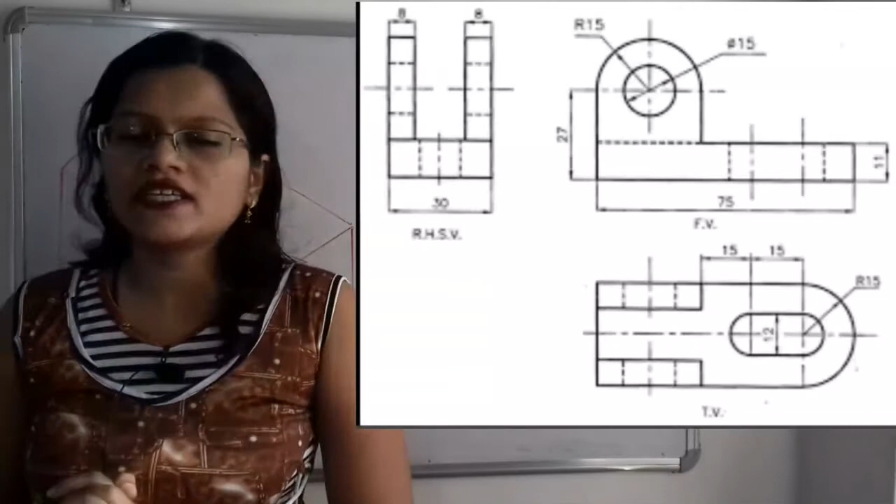So if we observe here, the total length that is given in the front view is 75 mm. What is the total height? So if we observe, the height is given up to the center of the semicircle. So we have to add the radius of the semicircle also. So it's 27 plus 15, that is equal to 42 mm.

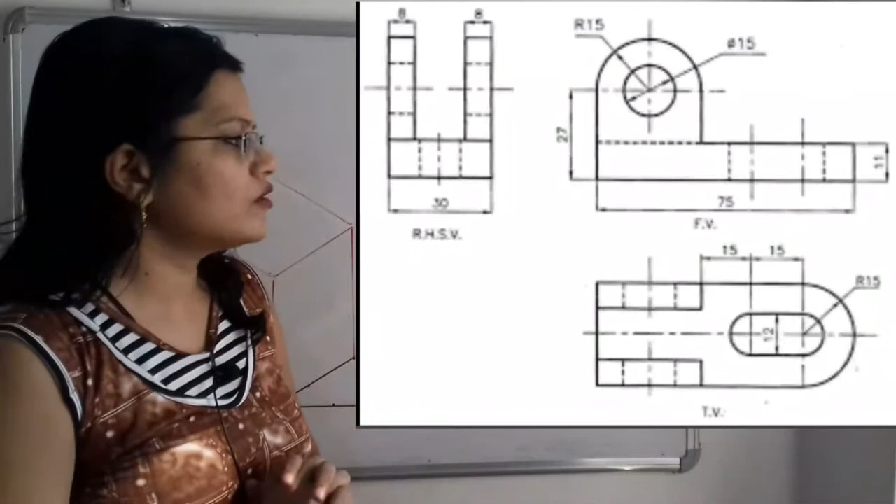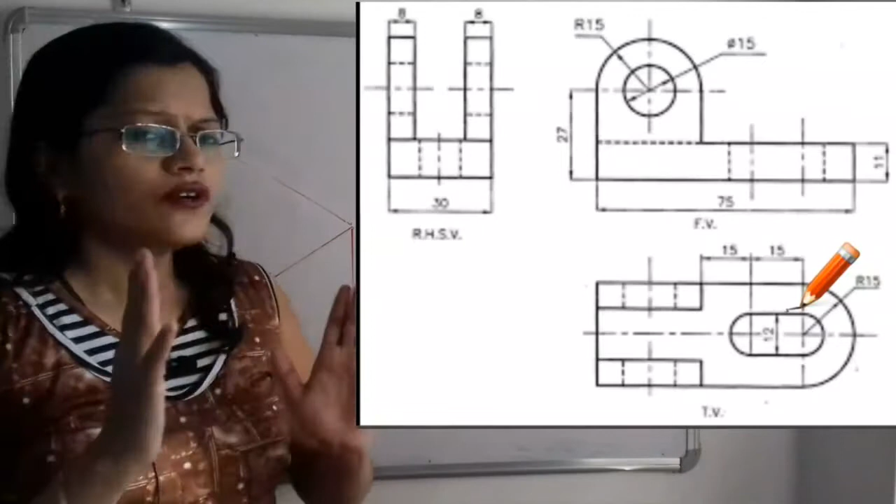And what is the width? So for that we will move to the top view. So if we observe, there is the semicircular construction for the width. So what is the radius of that semicircle? It is given as 15 mm. So we will take here the diameter, that is 15 into 2, that is 30 mm, as the width for that semicircular construction. So we will take here width is equal to 30 mm.

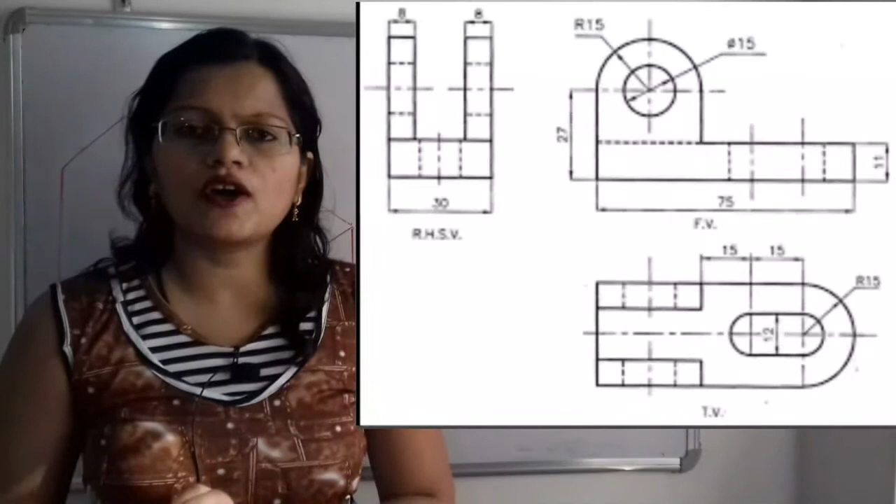So if we observe, the dimensions for this length, width and height are so small. So we will take here the scale 1:4, that is 1 millimeter in the orthographic projection is equal to 4 millimeter in the isometric projection. So if we observe, the front view is given on the right hand side. So we will plot the front view on the left hand side in the isometric projection.

So how to plot? For that we have to draw one basic horizontal line, and on that we will select one point. Now from that point we have to select 3 points at 3 different angles. So I will keep here the protractor. Now the first point is on the right hand side at a 30-degree angle, the second point is on the left hand side at a 30-degree angle, and here is the third point at a 90-degree angle. So now we have to draw the lines passing through these 3 points.

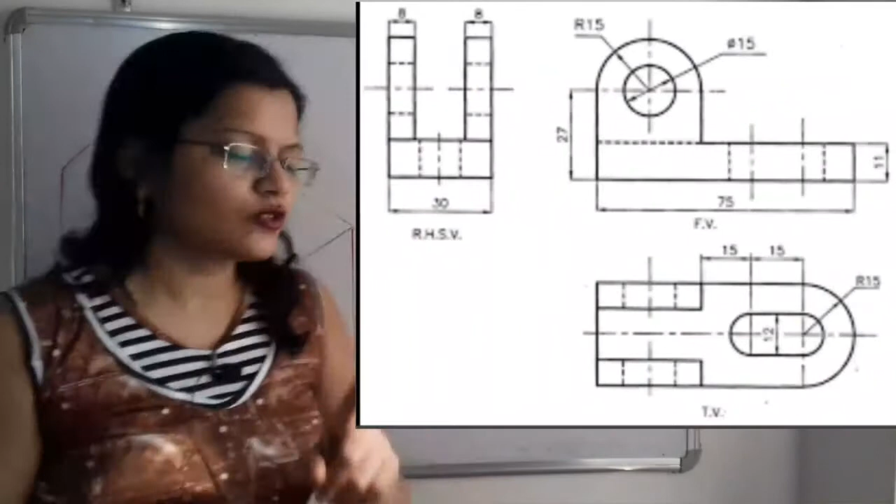Now because of this vertical line, that is the line passing through the 90-degree angle, there are two sides. This is the right hand side and this is the left hand side. So because the front view in the orthographic projection is given on the right hand side, we have to plot the front view on the left hand side. So what does the front view indicate? It indicates the true length and true height. So here on this line we have to plot the true length, and here we have to plot the height.

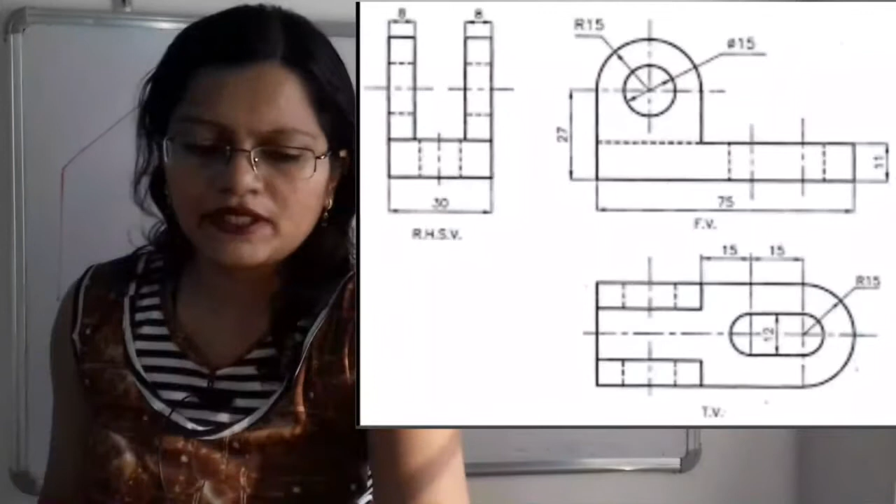So what is the length? Our scale is 1:4, that is 75 into 4, that is equal to 300 mm. And what is the height? That is 42 into 4, that is 168 mm. So how to take the dimension? Here 300 mm we have to take on this line, and we have to select one point. Now from this point take a vertical line parallel to this of the dimension 168 mm.

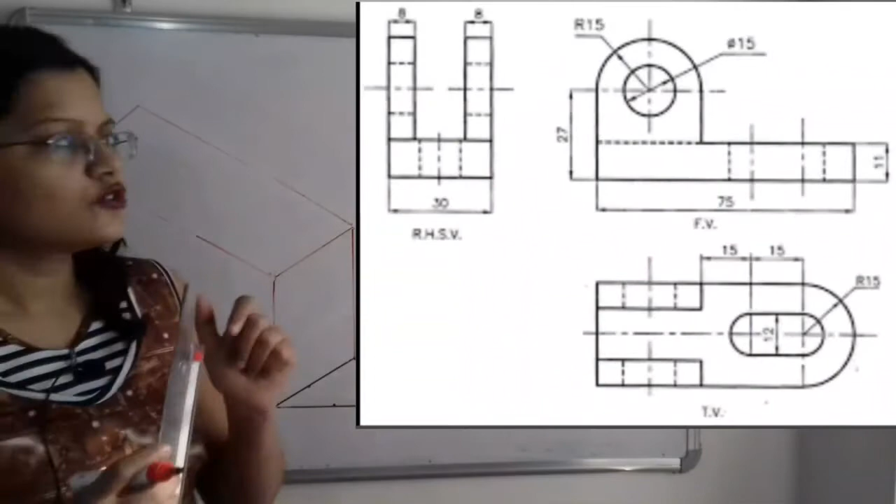Now on this line also we have to take the dimension of 168 mm, and now on the right hand side we have to plot the width. So what is the width? That is 30 into 4, that is 120 mm. We have to select here one point, and from that point we have to draw here one vertical line of 168 mm. Now these 3 points are getting selected, so we will join these points.

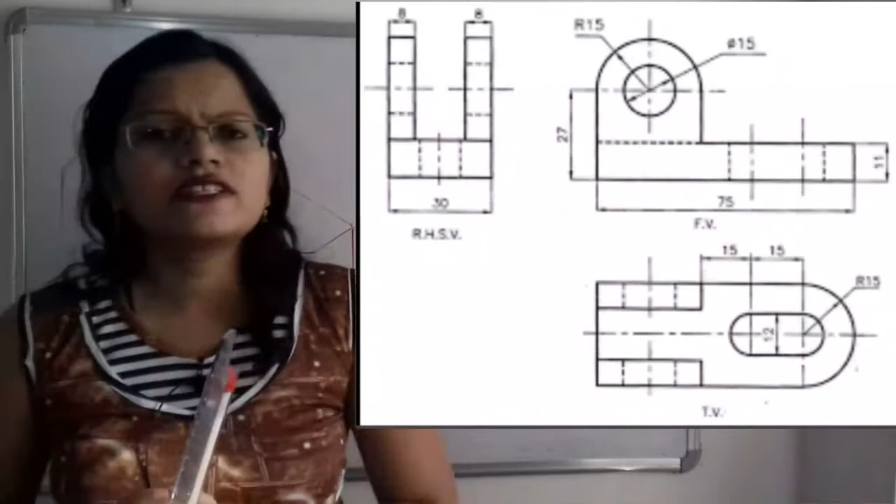Now from this point draw a parallel line to this, and we have to take the equal dimension of this line, that is equal to 300 mm, and we will select here the point, and we will complete this outline. So this is the outline for the isometric projection.

So if we observe, these 3 lines 1, 2, 3 are parallel to each other and indicate the dimension of length. These 3 vertical lines 1, 2, 3 are parallel to each other and indicate the dimension of height. And these 3 lines 1, 2, 3 are parallel to each other and indicate the dimension of the width. Now we will observe the front view.

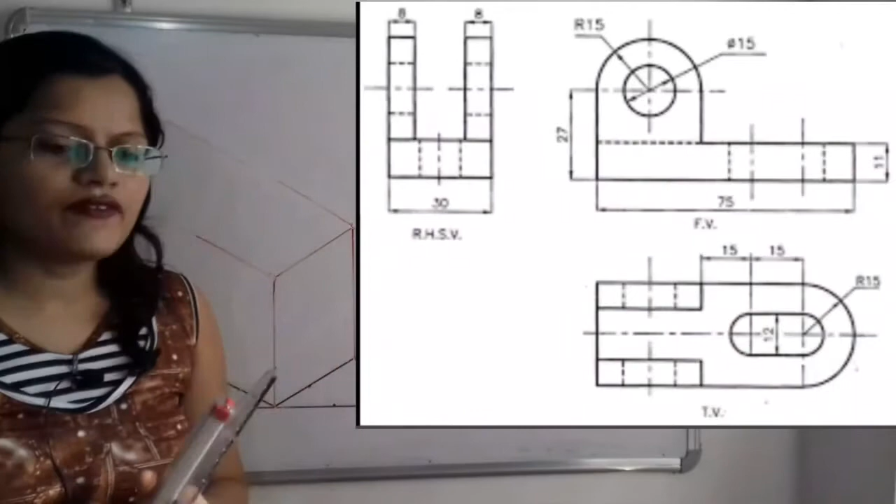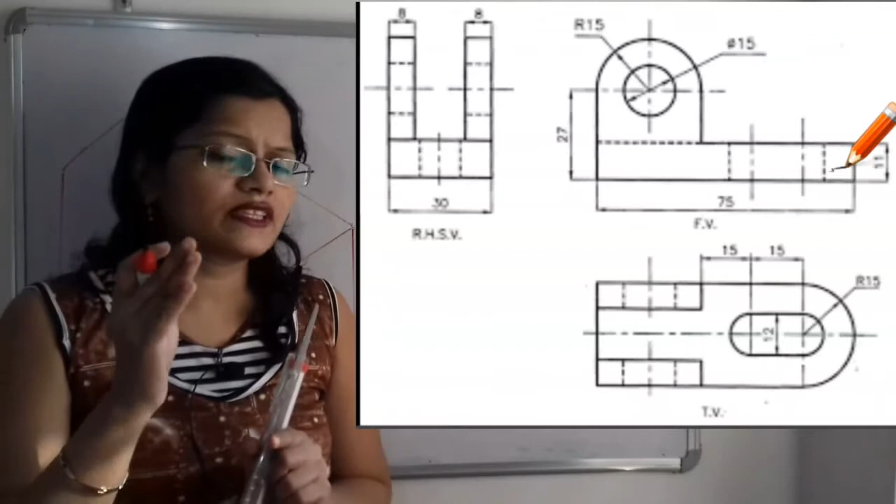So if we observe this front view, there is the construction at the base. So what is the height? Height is 11 mm, that is given. So these 3 lines 1, 2, 3 indicate the height. So on that height we will select the dimension with the scale 1:4, that is 11 into 4, that is 44 mm. So now we will select here the points that are at 44 mm.

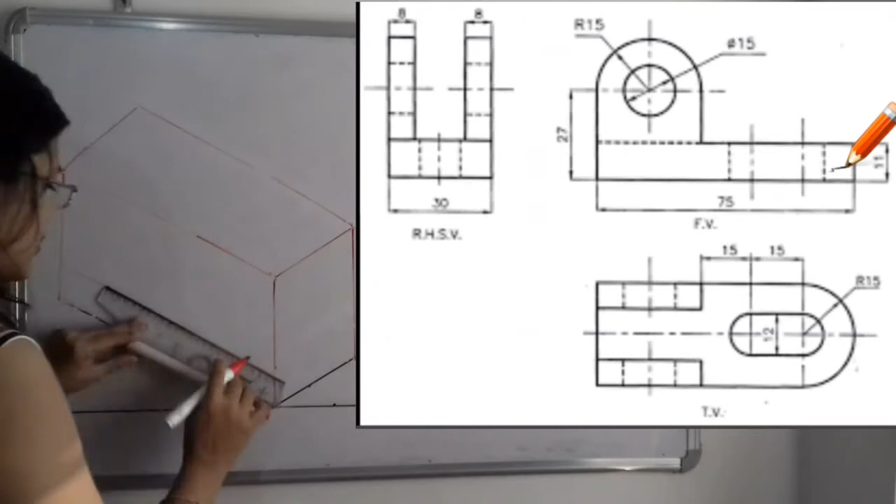Now we will just join these 3 points. Now we have to join these points with the help of the projection line. So the projection line should be faint. For the faint lines we have to use the 2H lead pencil, and for the construction line, that should be dark, we have to use the H lead pencil in the examination.

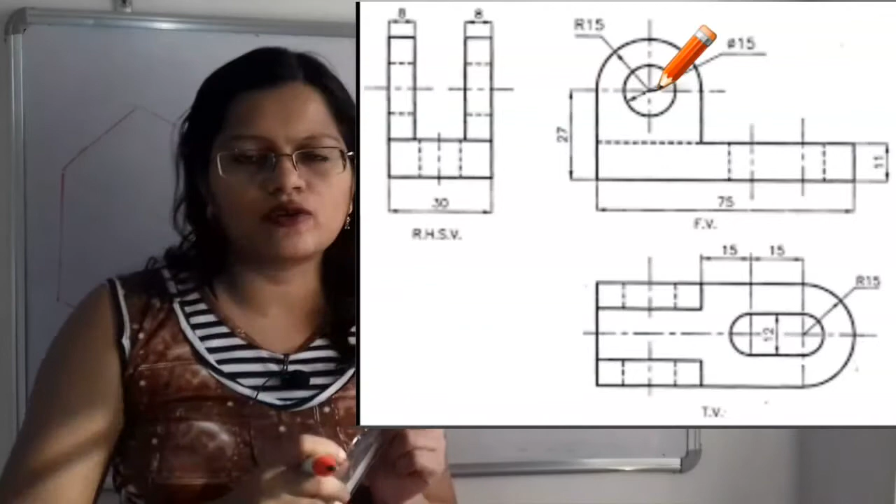Now if we observe the front view, there is the structure, that is the semicircle structure and the inside hole, and that can be clearly seen. So what does the front view indicate? The front view indicates the true length and true height. So if we want to plot this semicircular construction and this hole, we have to plot along this front view, because it can be clearly seen in the front view only.

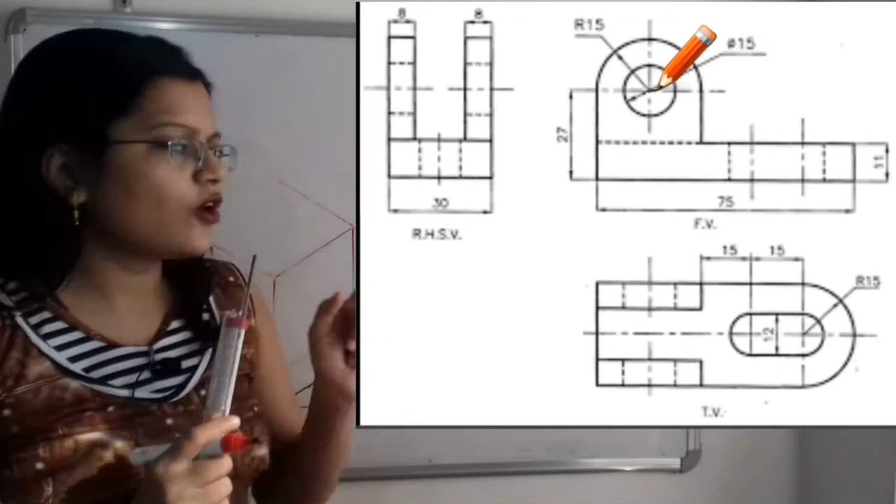Now if we observe the side view, what is this? A construction along the width, so it is repeated 2 times. What is the width for that? The projection from top view to the side view is given, and the width is given, that is 8 mm on both the sides. So along the width, the construction for that semicircle and that hole is repeated 2 times at these 2 corners along the width.

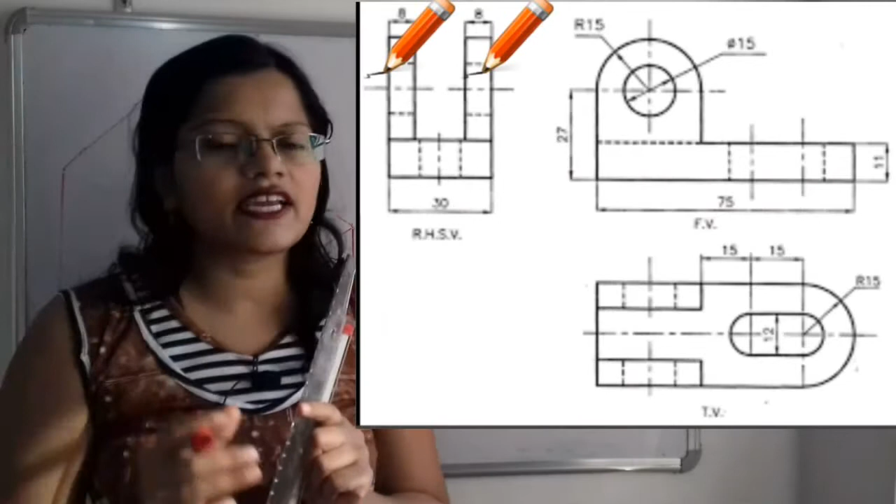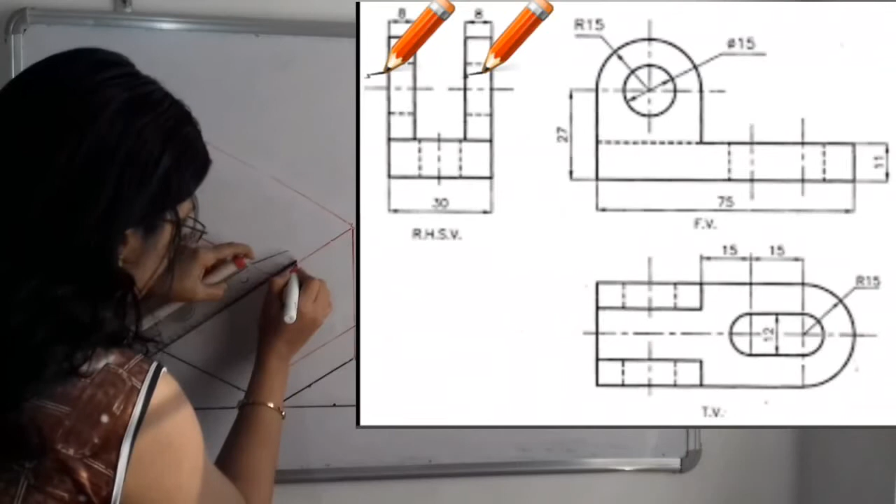And what is the width? That is 8 mm. So with the help of scale 1:4, we have to take here 8 into 4, that is 32 mm. So I will select here the points at 32 mm from both the sides. Here also we have to select the point, because this construction is along the width. Now we will just join this point with the help of the projection lines.

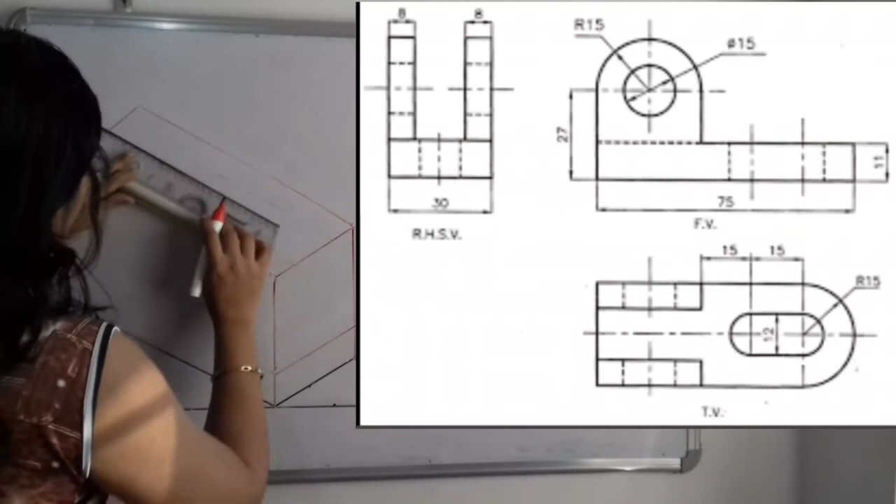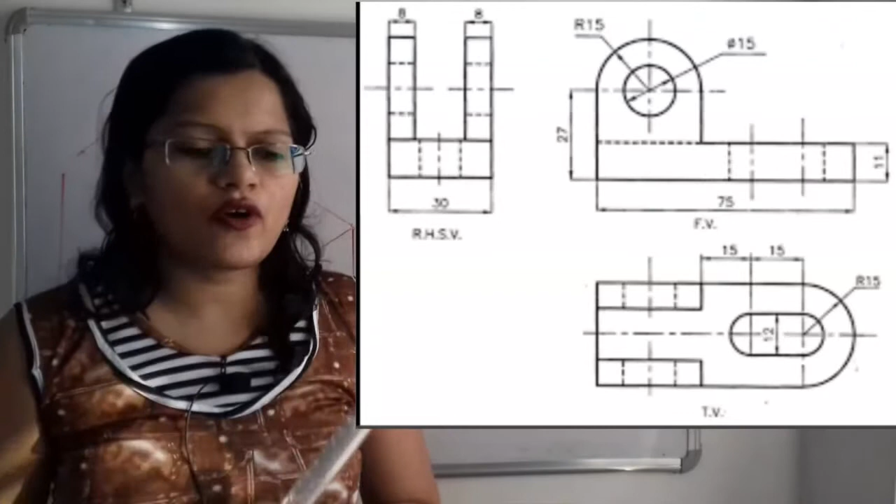So with the help of these faint lines, this is getting indicated. Now along this width, this construction is getting repeated. So let us first plot this semicircular structure as well as that hole. How to plot? For that we have to just select here one block. Along that block we will complete the construction of that semicircle. So what is the radius r for that semicircle? It is given that radius r is 15 mm.

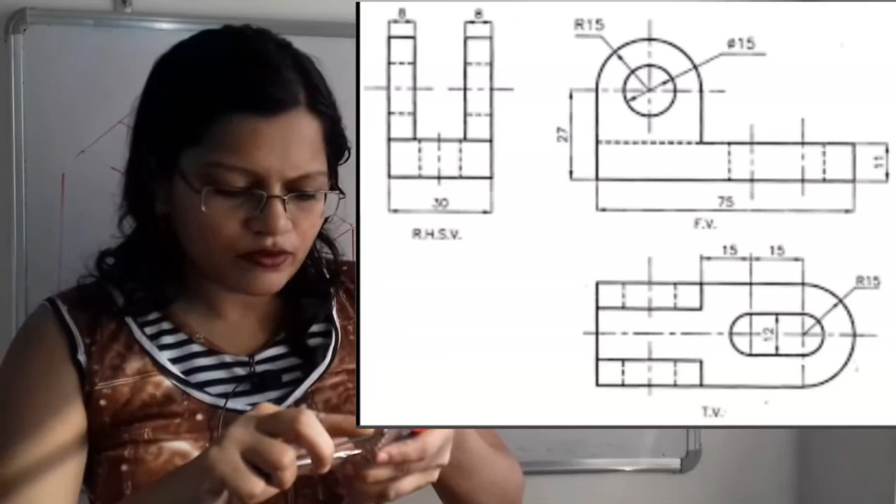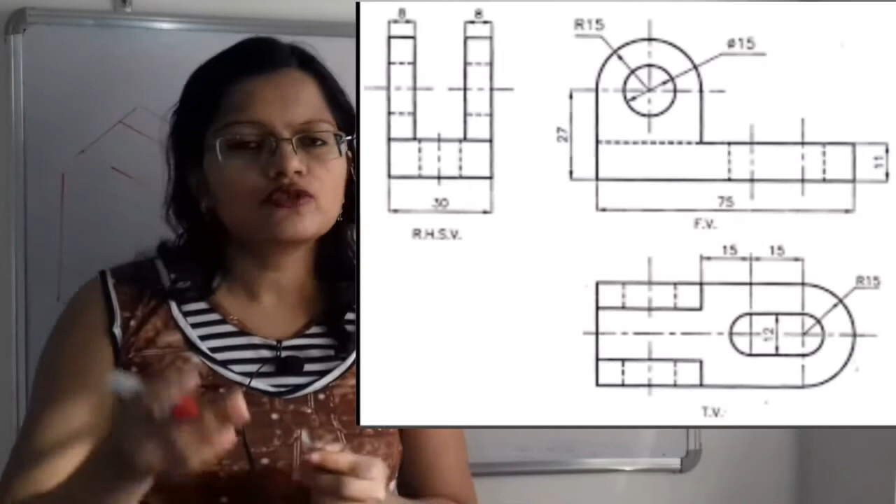So with the help of scale we can say that 15 into 4 is equal to 60 mm. So in the compass we will take that distance, 60 mm. When we are going to complete the structure for that semicircle and hole, because this semicircle and hole have the same center, we have to first locate the center. So it is important to know how to locate the center.

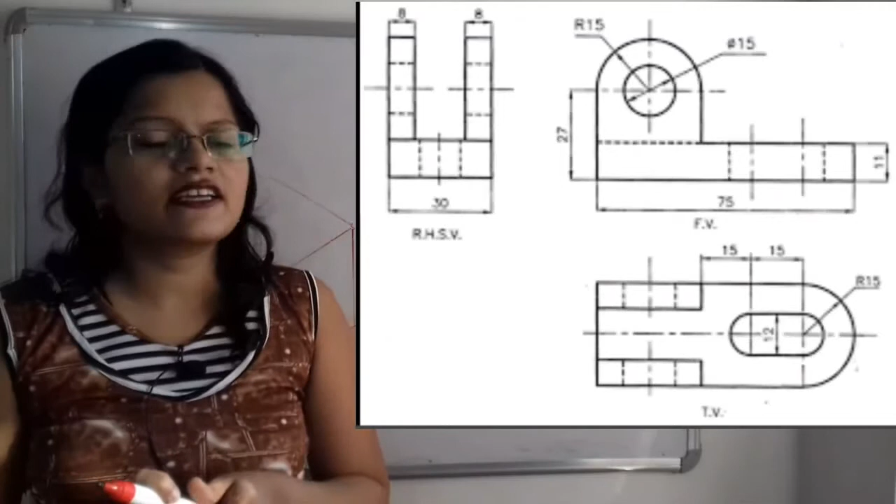So now I will take here 15 mm, that is 15 into 4, that is 60 mm distance. I will mark here one point, and here on the height line also I will mark one point at 60 mm. So why only on these lines? This line indicates length and this line indicates the height. This structure can be seen clearly in the front view, and in the front view we can see the true length and true height. So these are the true length and true height lines.

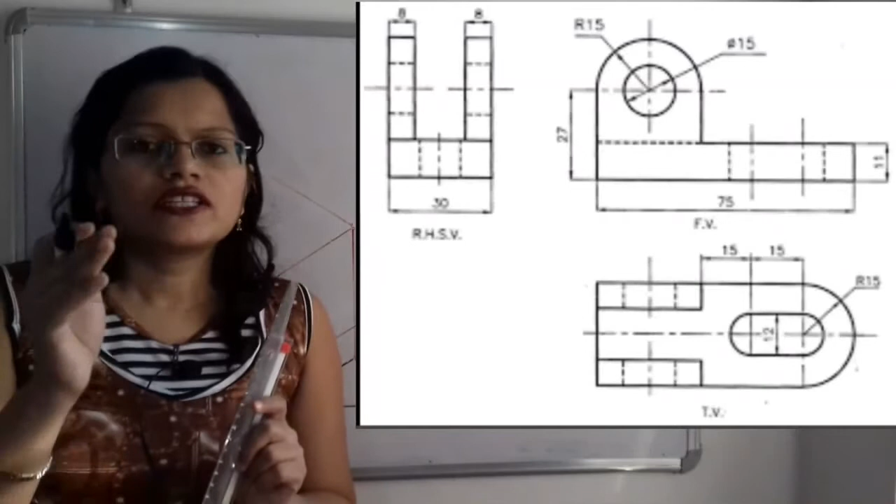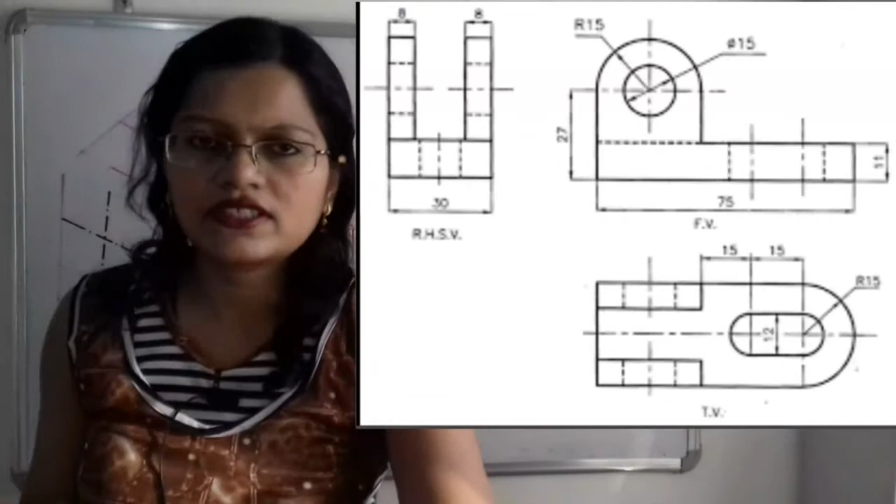So now from this line we will draw the parallel line. For the location of center, if we draw the parallel lines passing through these points, the intersection of these 2 lines will give us the location of center. We have to draw the lines passing through the center in the form of dash and dot. So take the line parallel to this height passing through this point. Remember that line should be in the form of dash and dot. Here also draw the line in the form of dash and dot. Now this is the point of intersection, and it gives us the location of center.

Now we will complete the structure of the block. Again we will take the distance equal to r, that is 60 mm, and from that center on both the sides of these lines we will locate the point. Here is the point and here is the point. From that point we have to again draw the line parallel to this height as well as length. So this is the block.

Now if we observe, here is the larger included angle and these are the smaller included angles. We have to join this larger included angle with the opposite side middle point. These two are the middle points, so I will join this. This is the point of intersection. Now again, if I join this smaller included angle, these are the points where the three lines intersect at one point only. These points are very important. Here is the point, here is the point, and this is also the point. So these are the three centers.

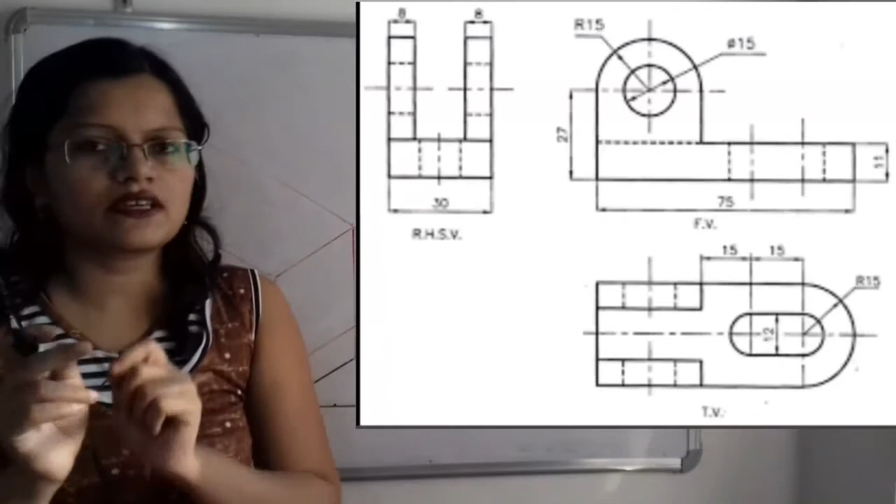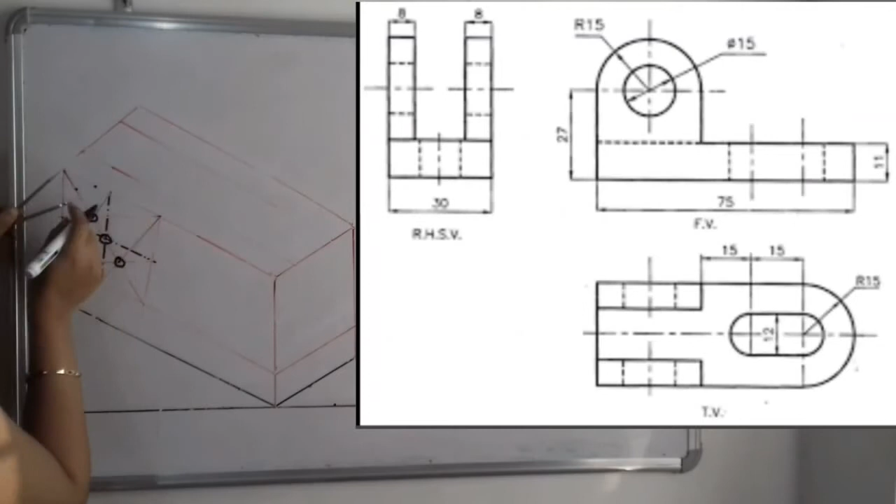But remember that for the construction of the semicircle, we only have to complete the upper half portion. So only these two centers we have to select. Now with the help of compass we can easily complete this. Take this center, and from this center these are the two end lines. We have to join up to these two lines only. With the help of compass we can easily complete this part. So I will complete here.

Now we will select this second center. So for the second center also we will take the distance in the compass, and now we have to join these points. So with the help of compass we can take this distance. So in this way the semicircle is getting completed.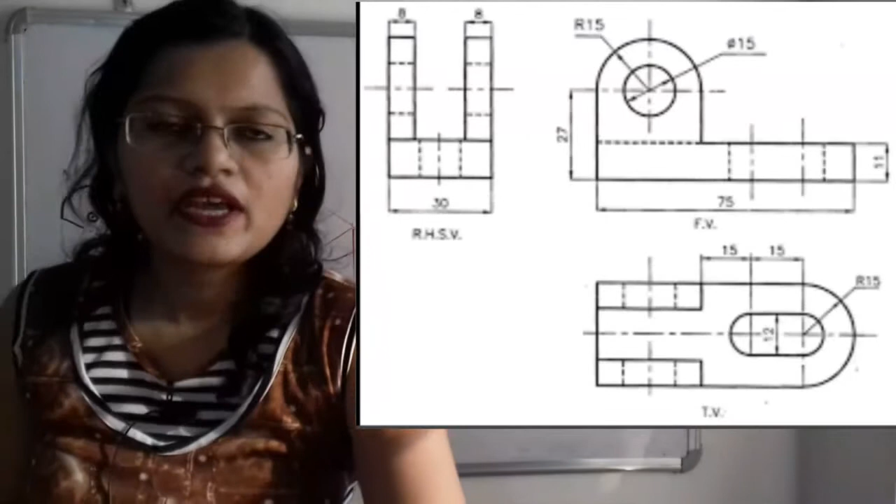Now if we observe, this semicircular structure is getting repeated, because on this line also, along this width, it is getting repeated. So it is not possible to construct this structure again and again. So we will shift the centers. Now this structure is getting repeated along the width. So how to shift the centers? So this is the center on this front face. Now where is the location of the second line? So we will say that here is the gap of 8 millimeter. So 8 millimeter means we have to shift the center 8 millimeter along the width on the back side. So 8 into 4, that is 32 millimeter.

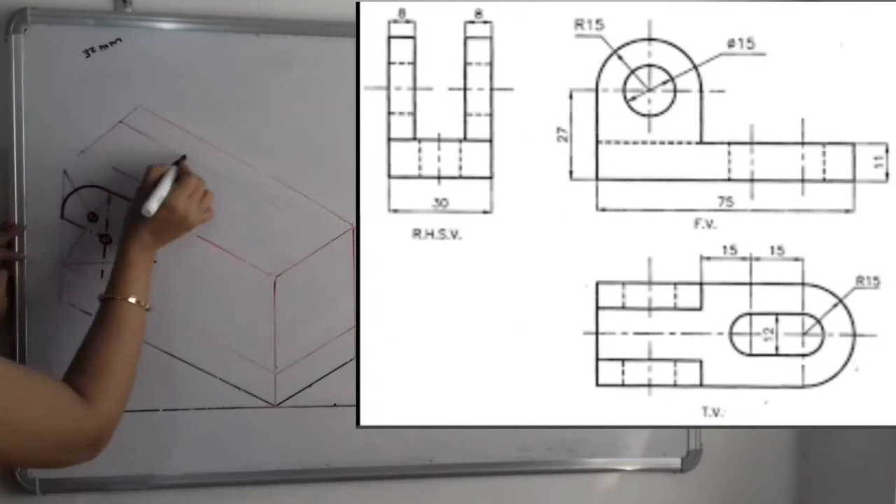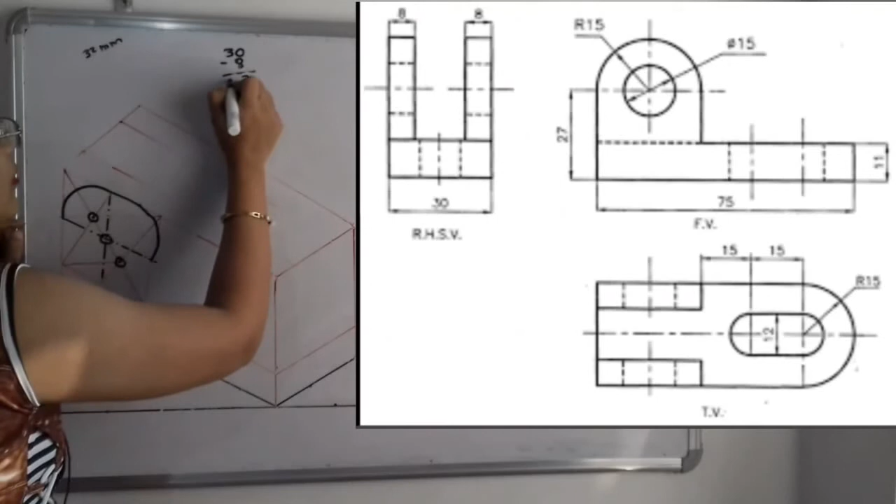Now where is the location of this line? So if we observe again, we have to find out what is the distance of this first line up to this line. So what is the total width? Total width is 30. So from 30, if we subtract this 8 millimeter from this corner, then we will get the distance in between these two. So what is the distance? That is equal to 22 millimeter. So we have to shift the center 22 millimeter and again we have to shift this. So what is here? That is 8 millimeter, then 22 millimeter and then 30 millimeter. So we have to shift the distance.

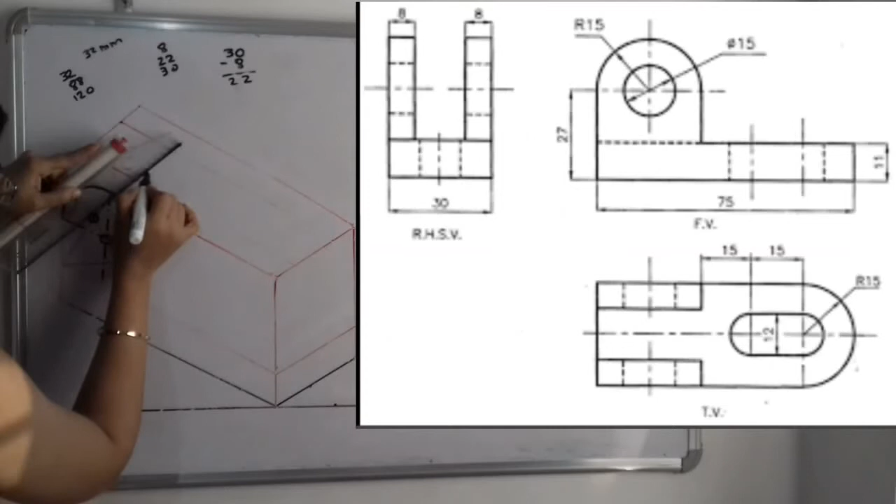Now our scale is 1:4. So here 1:4, that means here 32, then 88 and here is the 120. So now I will shift at a single time. So how to shift? Now we have to shift the centers along this width. So we will take the line parallel to the width, and along that line only we will shift the centers. Now first is 32 millimeter. So first center will be here. Then second is 88 millimeter. Second center will be here and third is 120 millimeter. So here is the location of the center.

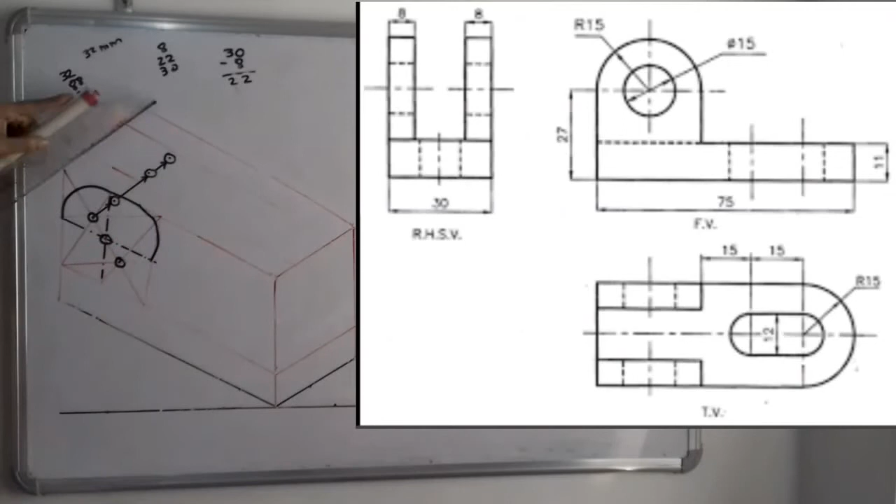So now I have marked here. We will show here with the help of the arrow also. So this is what we have shifted. Now again we will shift the second center. So here is also the second center. Now again first is 32, then again it is 88, and again it is 120. So again we have to show with the help of arrow. So this is what we have shifted.

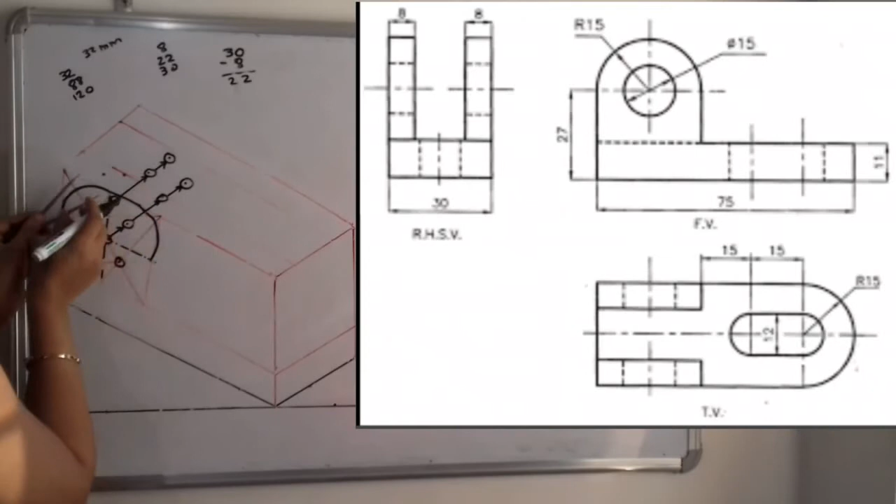Now how to complete it? So again with the help of compass we have to take the same distance. So for this first center, this is the distance we have to take. So again with the help of this we will complete some portion of that curvature. Now if we observe the hole, these are concentric. So this hole and semicircle have the same center. So we know the location of center and the lines passing through it.

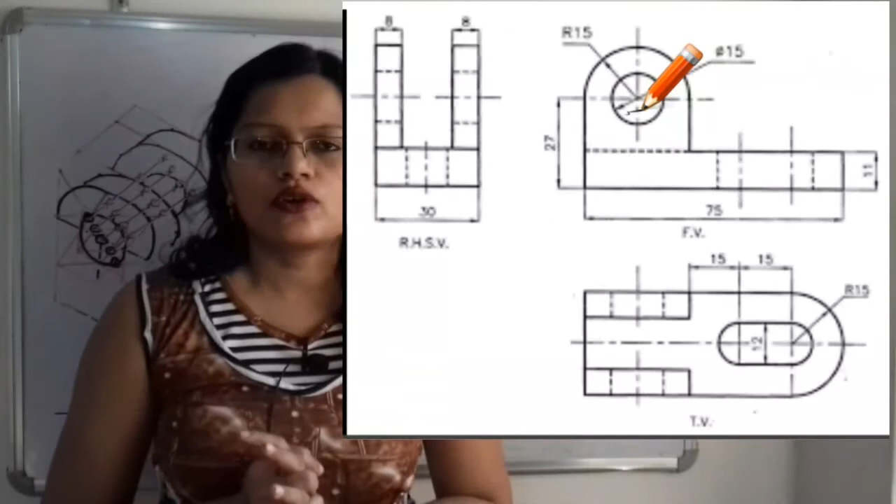So what is the radius of that hole? Here the diameter is given 15 millimeter. So 15 divided by 2, that is 7.5 millimeter. So with the help of scale, that is 7.5 into 4, that is 30 millimeter, we have to take the distance in the compass, and we have to mark that same distance on both sides of the line passing through the center. So if we plot here the points, we have to draw the line parallel to this height as well as length. So this block is getting completed. Again we will follow the same procedure, that is we will join this larger included angle to the middle point of the opposite side. So this point of intersection will give us the center, and we will complete this hole.

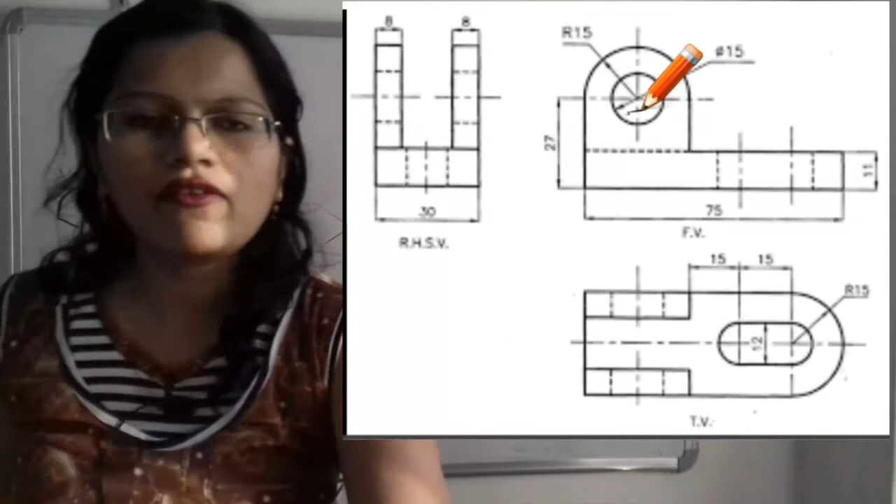So again we will follow the same procedure, that means we will shift the centers of this hole on the backward side, because the structure of hole is also getting repeated on these faces along the width. So again we will take the distance, that is 8 millimeter, then 22 millimeter, and then 30 millimeter. So with the help of scale we will shift it, that is 8 into 4, that is 32 millimeter, then 22 into 4, that is 88 millimeter from this center, and again up to 120 millimeter. So with this new center, again we will take the same distance in the compass, and we will complete the hole.

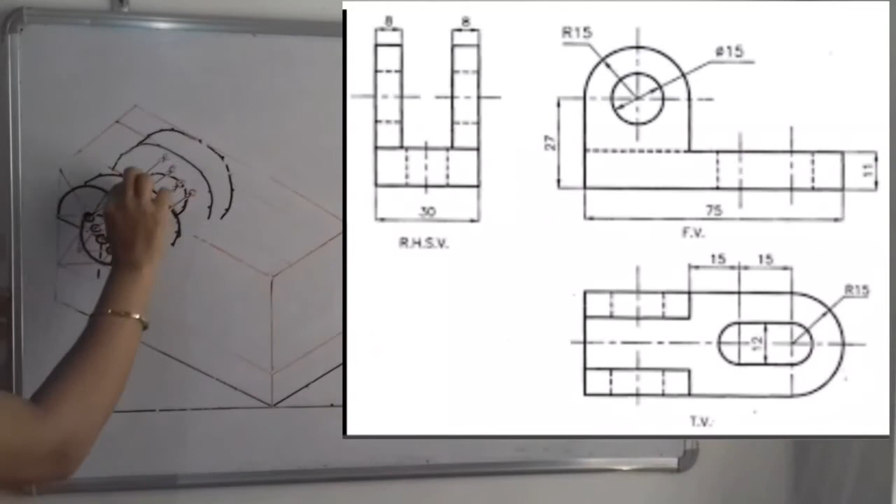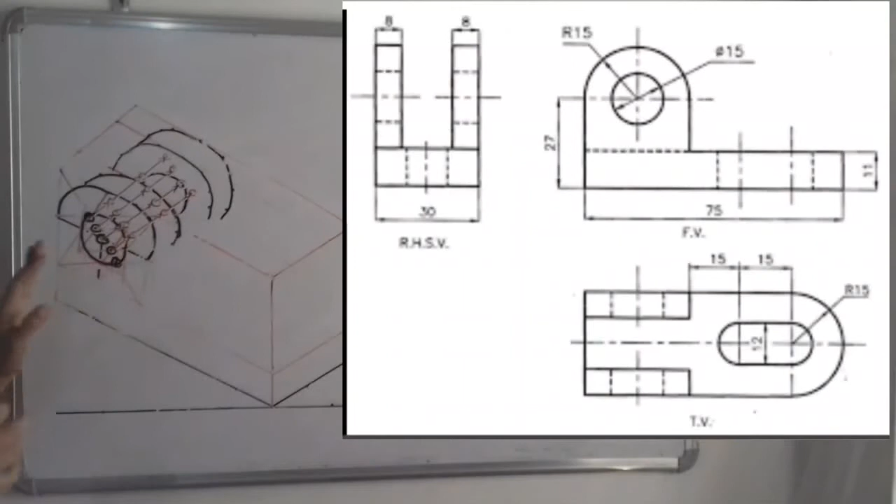Now what happens to this side, that is this face, the semicircular structure? Here, because of the front face, the hole cannot be seen, so there is no need to complete the hole. But here the gap is more, so we have to complete the hole, that is, some part of the hole is getting completed here. So here this hole is getting shown. Because of the shifting centers, with the help of a compass we just have to complete this part of the hole. Now we will move on to the next.

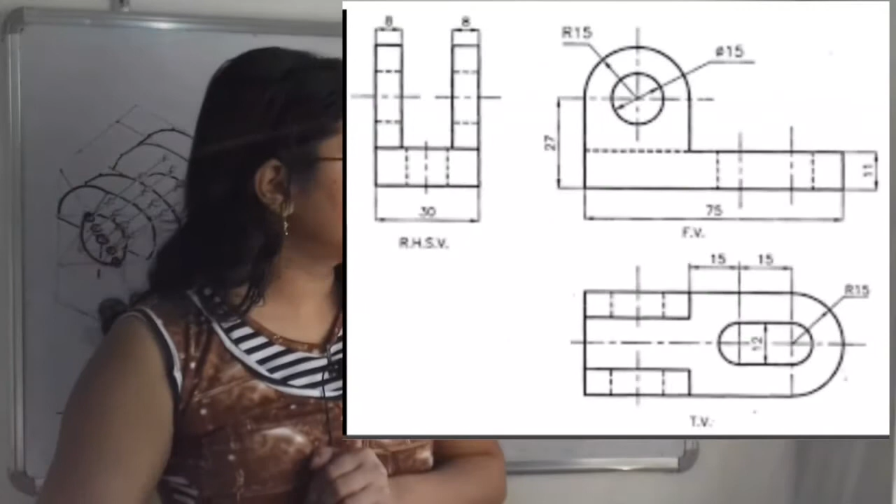If we move from the front view to the top view, again there is the semicircular structure, and part of the semicircle is getting completed. If we observe, that part of the semicircle and the big semicircular structure have the same center. So again we have to locate the center. How to locate it? Here R15 is given, so we take the distance in the compass, 15 into 4, which is 60 millimeter, and we mark the points.

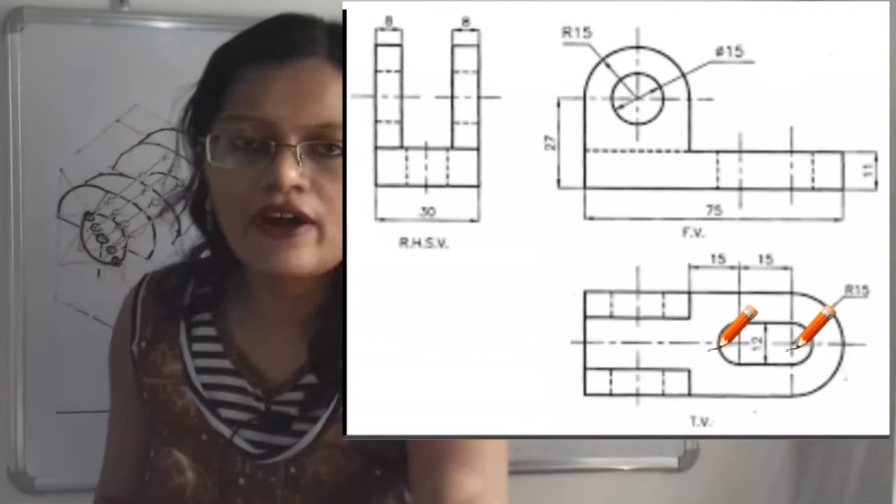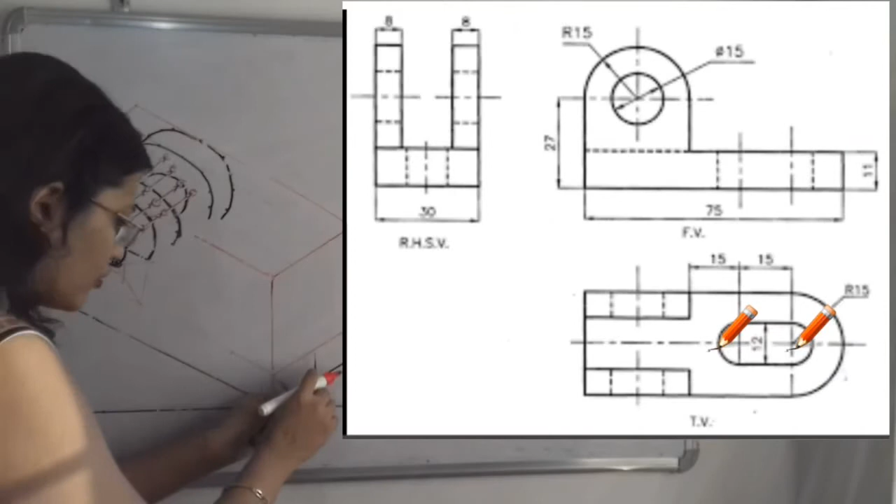Now from the top view, what are the true lengths? The width is the true length, and the length is also the true length. That means the total length and total width we can see clearly. So along the length line I will select one point, and along the width line I will also select one point. From these points I will draw horizontal and vertical lines parallel to the length line and width line. The point of intersection gives us the location of the center.

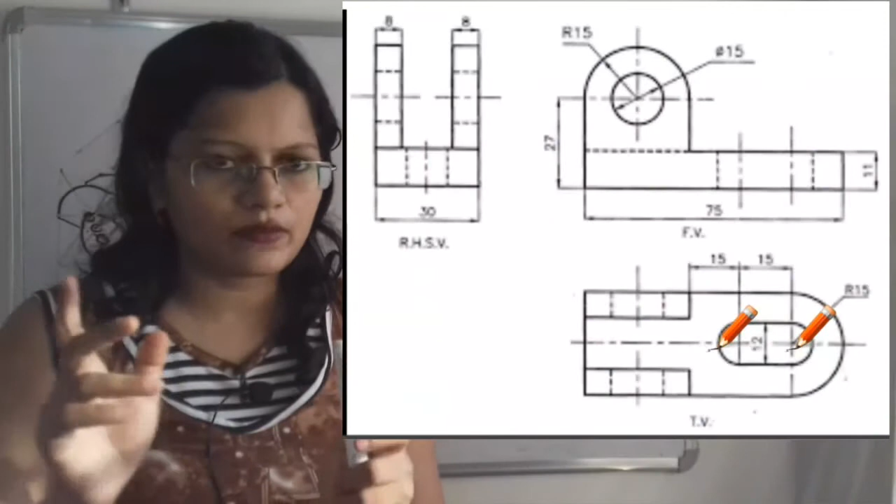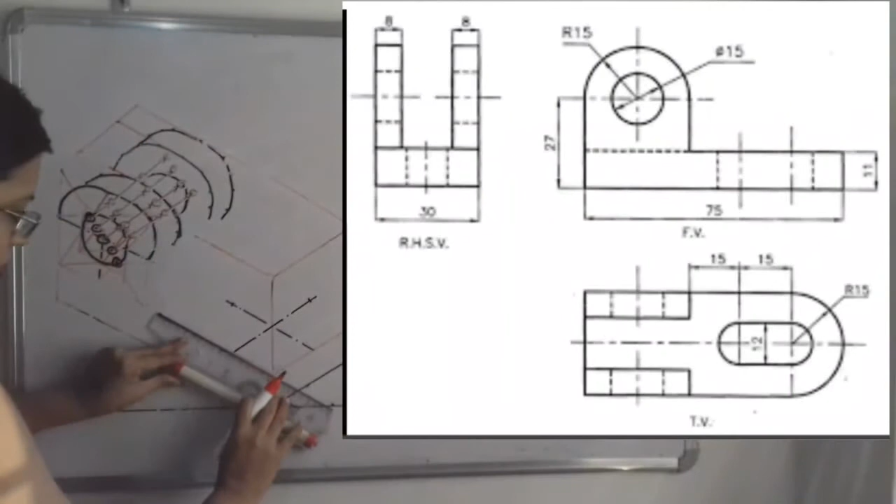So here is the location. Now we have to complete that box. How to complete it? Again we take the distance equal to r in the compass and select points on both sides from the center. Then again we draw lines parallel to the length and width. From this point draw one parallel line, and here also we draw one parallel line. So this block is getting completed.

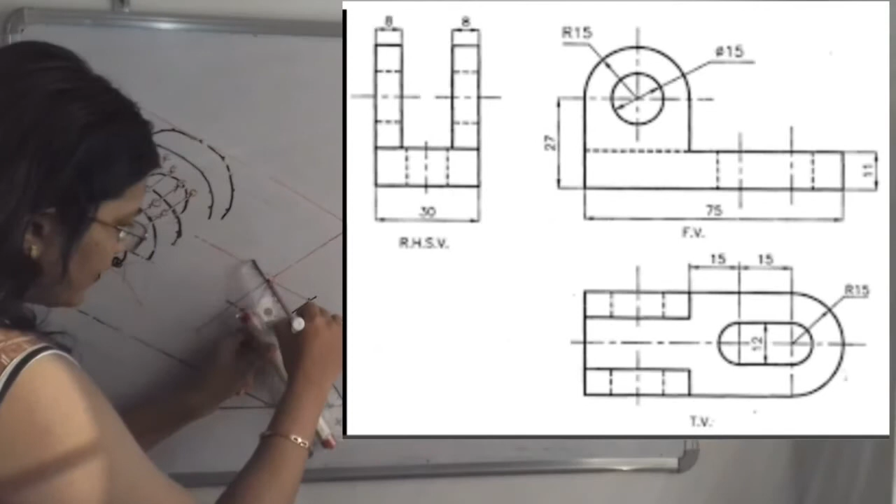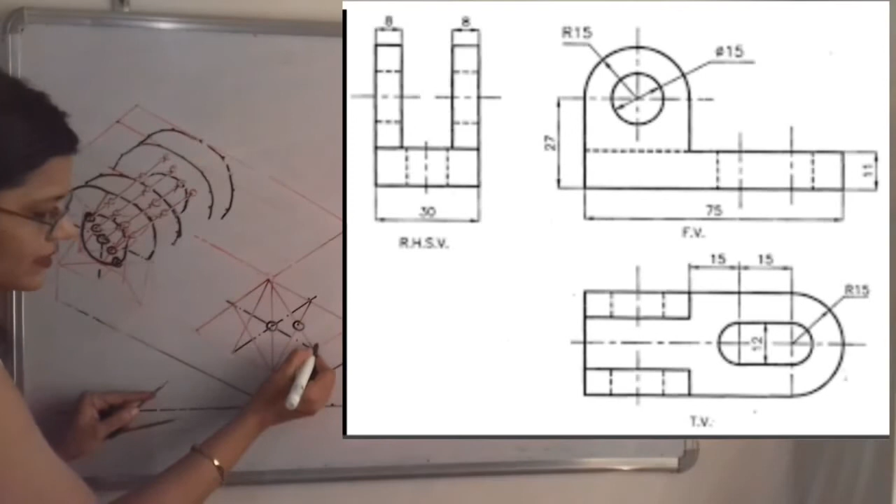Here is the larger included angle. Again we follow the same procedure: join this larger included angle to the opposite side middle point. So it is getting completed, and this is the center. Remember that only half portion of the semicircle is getting completed. So what is the center here? This is also the center and this is also the center. These are the two extreme sides from this center, so take the distance equal to this, and with the help of the compass we join in this way.

Now this is the second center. Again we take the distance equal to this radius r and complete it. So this is the semicircle that is getting completed.

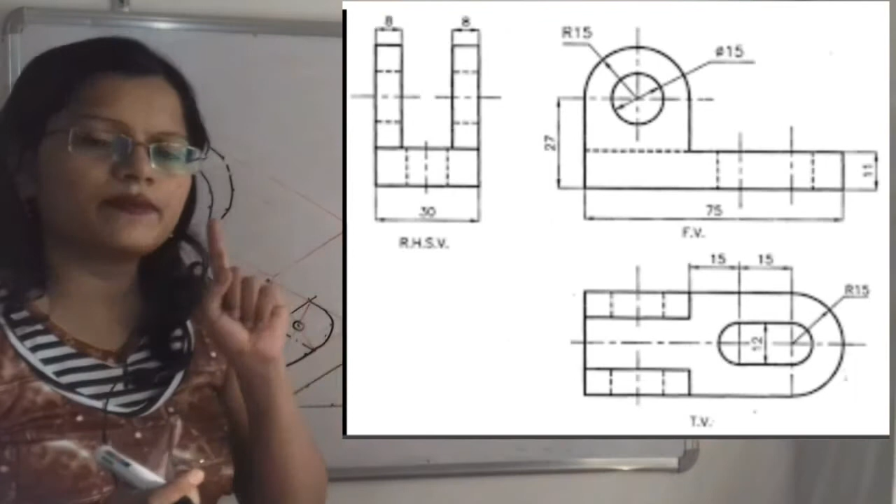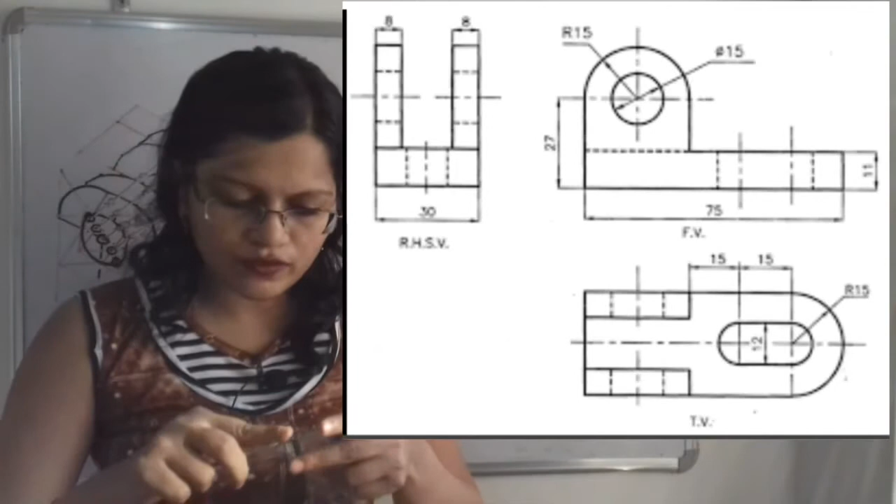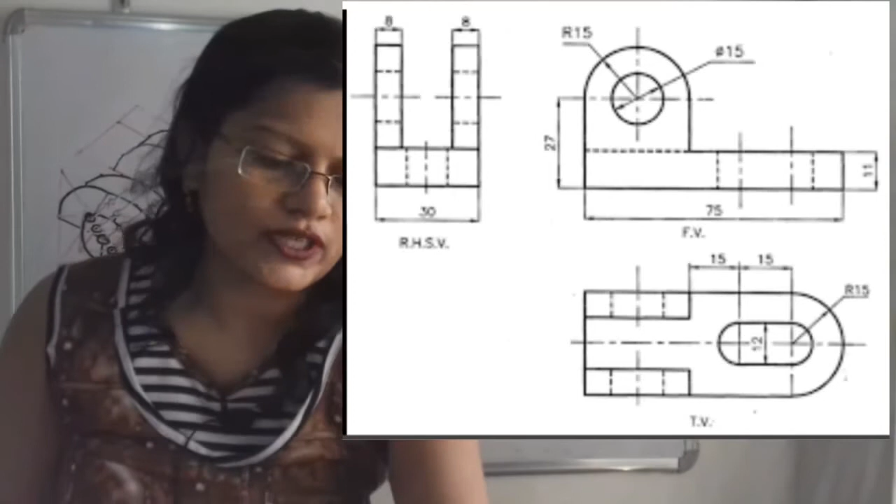Now inside it there is another semicircle with the same center. What r is given? The vertical distance, that is the distance along the diameter, is given as 12 millimeter. So the radius r is 6 millimeter. What distance do we take in the compass? 6 into 4, since our scale is 1:4, equals 24 millimeter. We take this distance in the compass and mark the points on both sides of the center, and now we draw the lines passing through those points.

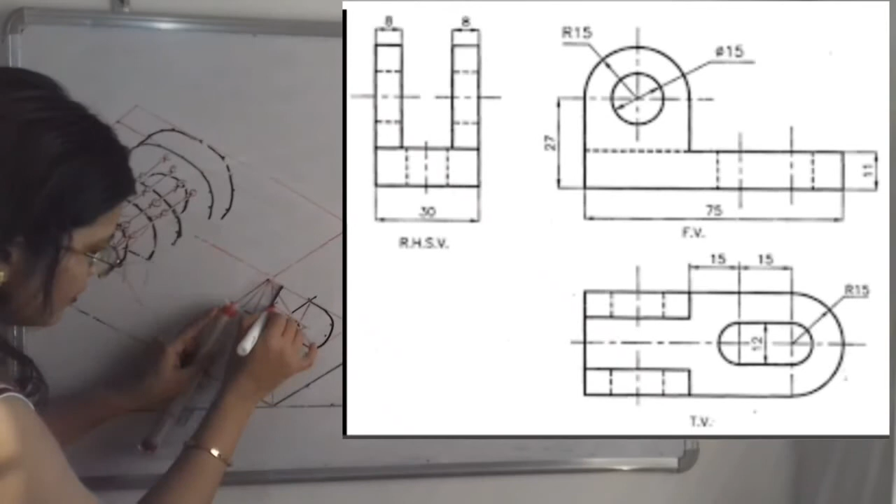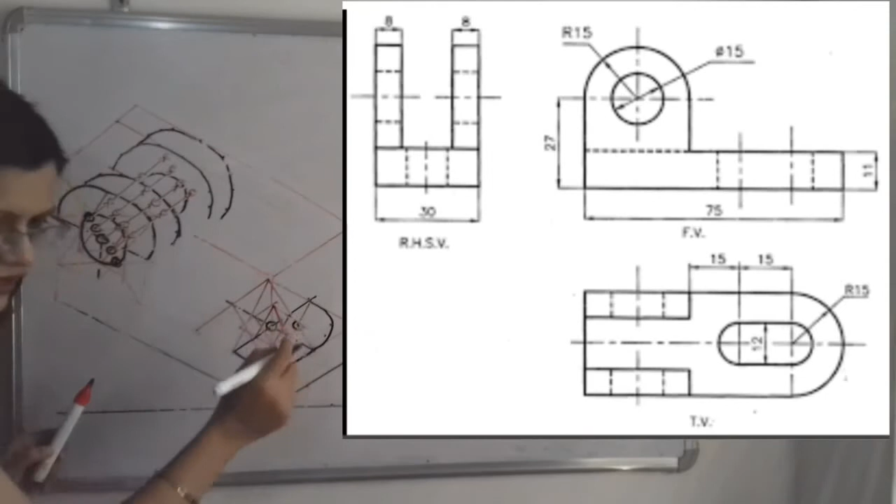If we observe again, here is the block. These are the larger included angles. Join this larger included angle to the opposite side middle point, and we get these centers. Now, with the help of this center, since only a semicircle is there, we have to complete only the half portion, after this side only. So we just join this part. For this correct shape, with the help of the compass we take this distance and complete it.

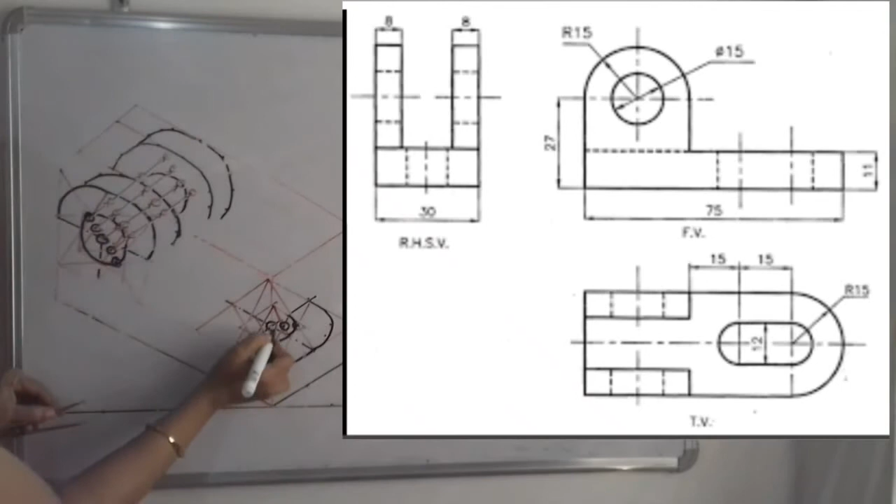So there are two centers, and with the help of these two centers we have to complete it. This is the second center. Now I have marked here. So this is the shape that is getting completed.

Now if we observe the other side, there is the semicircle but in the opposite direction, and the distance in between those centers is 15 millimeter. So we have to extend the edges of this semicircle for this 15, that is 15 into 4, 60 millimeter. Here the edges are getting extended.

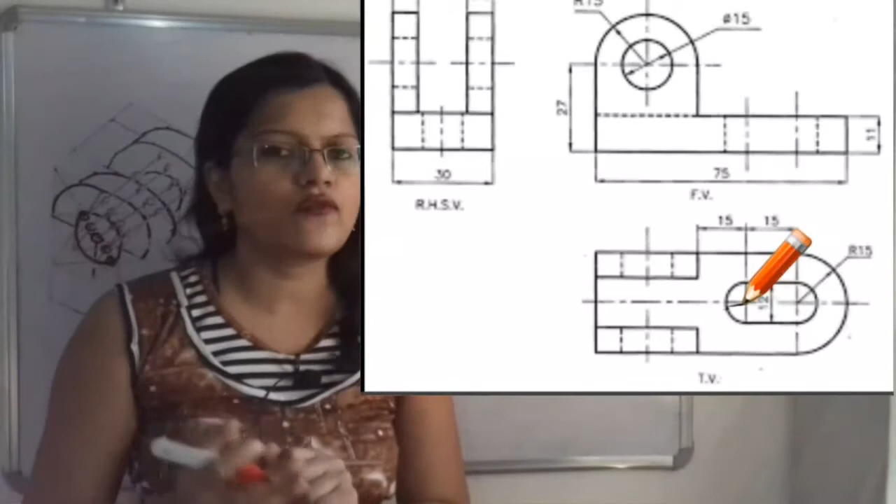In the same way there are total 3 centers, that is this is the first center, this is the middle center, and this is the third center. So all the 3 centers we have to shift on the backward side for 15 millimeter, that is 15 into 4, 60 millimeter. Now how to complete this semicircle?

So here is the middle center, for which the distance in the compass we have to take equal to radius r of that semicircle, and we have to complete this opposite side, because with this distance we have completed this side, that is the downward side, but this semicircle is in the opposite direction, so we have to complete the opposite side semicircle with this distance. And for the remaining distance we have to take the other center on the opposite side, take that distance, and complete here the remaining part. So this semicircle is getting completed.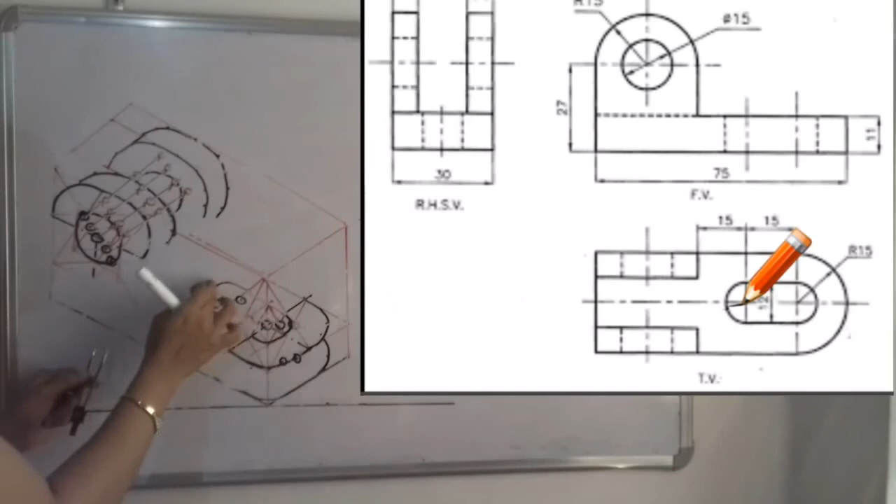So now we will highlight the edges. So here the distance in between those we have to take with the help of the dark marker. Now in the same way, because of this semicircle, this structure is getting repeated at this bottom face. So we have to again shift these centers for that big semicircle. So this is the center that we have to shift.

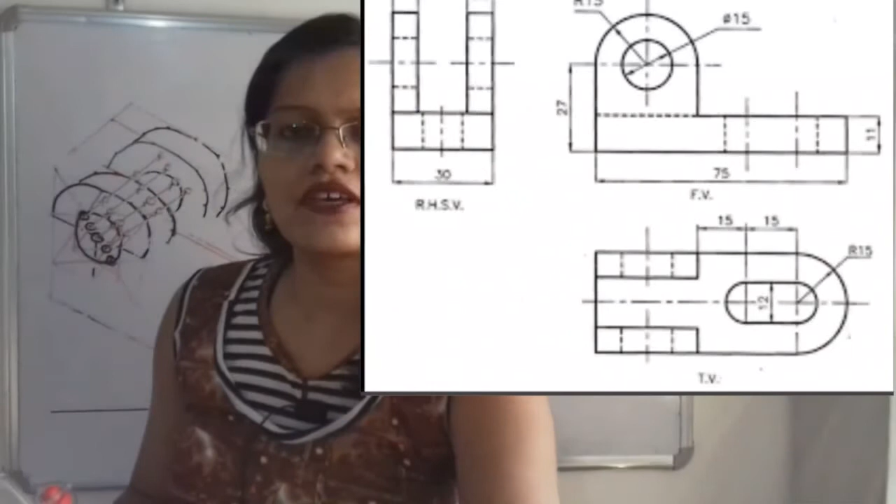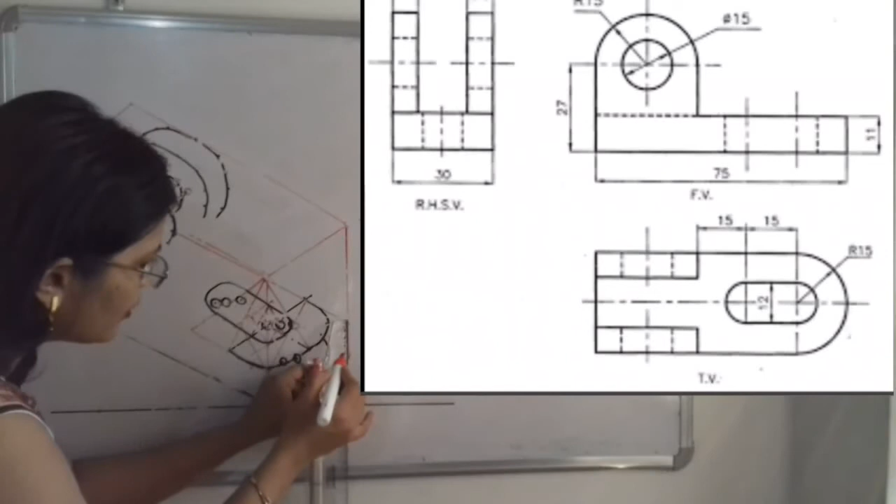So now because of these two centers we have to take the distance in the compass and complete the remaining portion. So this portion is getting completed. Now we will highlight the structure. So if we observe, there is the front view up to this portion, we have to complete it, and here also we have to complete this structure.

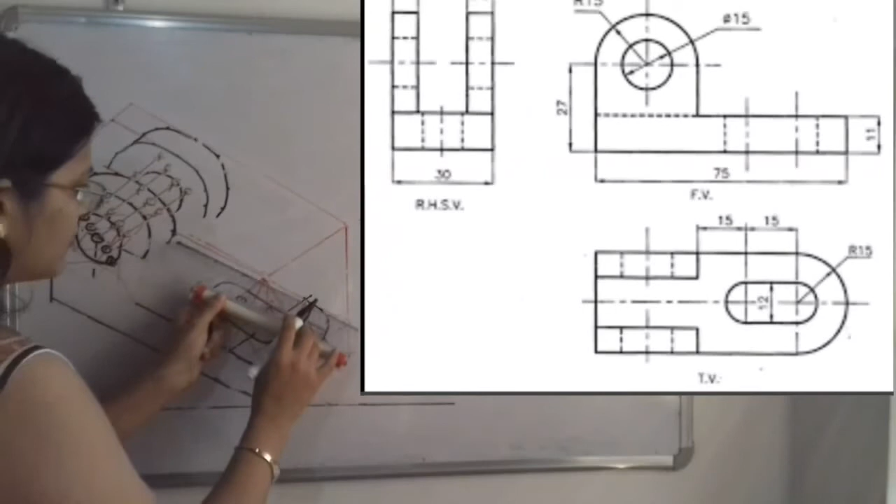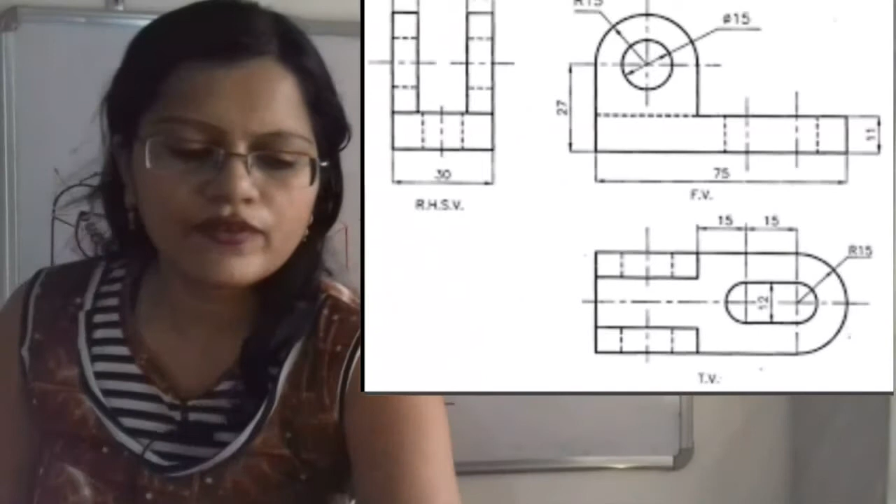Now here, what is the height? From the base it is given, the height is 27 millimeter. So now this corner and this end of that semicircle we have to join with the help of a straight line. So in the same way we have to join. So how to join? First we will select the end points of that semicircle that are getting repeated. So for that we have to take the line parallel to the width, and so this is the end point, this is the end point, and this is the end point.

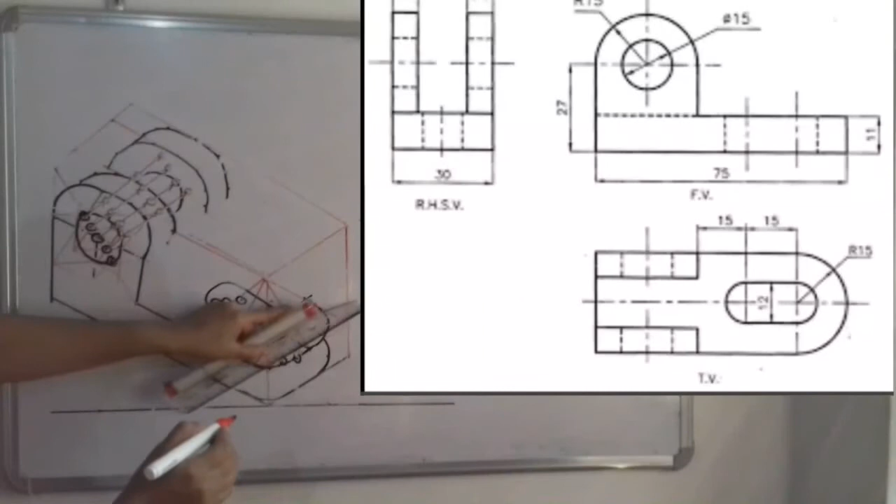So now for this end point we will draw here one line passing through this corner, and that should be parallel to the width. So this is the line. So these are the projection lines, so we have to show them by faint lines, and here is also the line. So now how to complete it? So we will take here the line parallel to it.

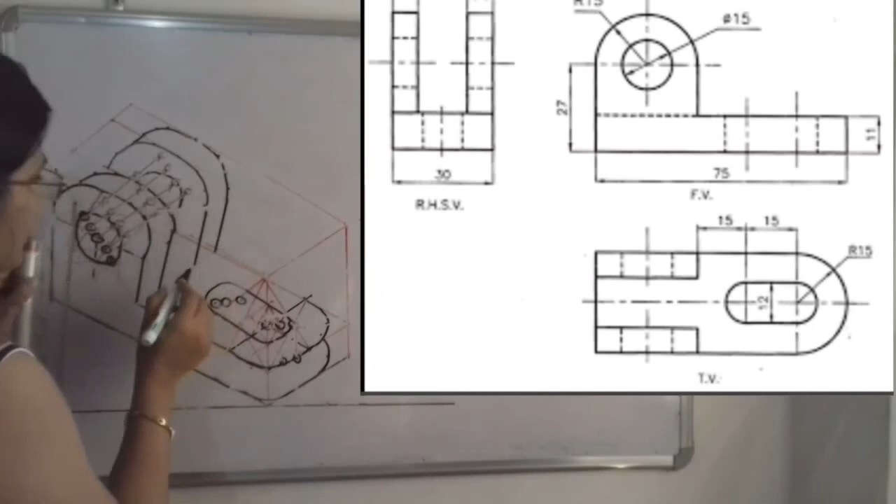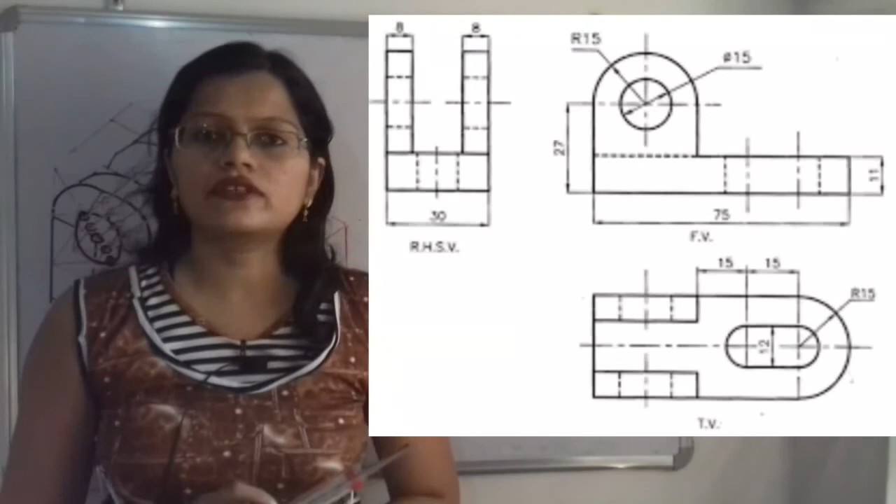So in this way the structure is getting completed. So now we have to join this structure. Now again these two ends we have to complete. Now most important part is how to highlight this structure. So here it is getting highlighted. Now the most important part is that we have to give the dimensions. So now we will give the dimensions.

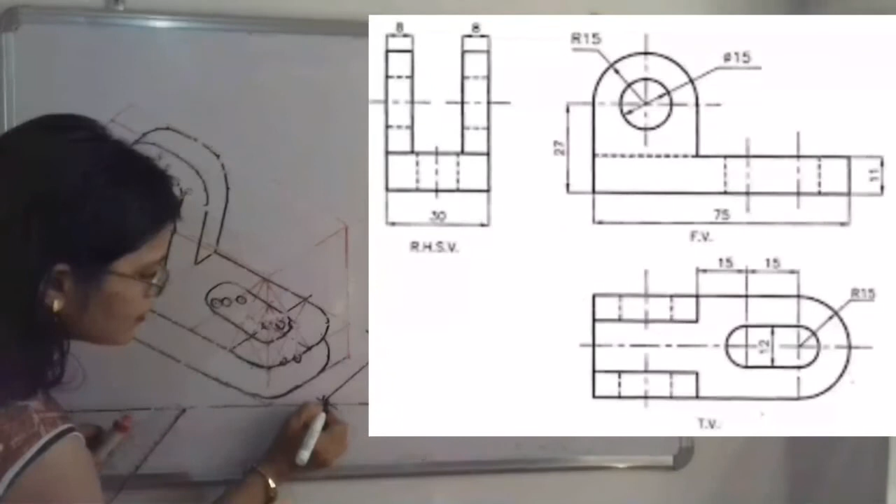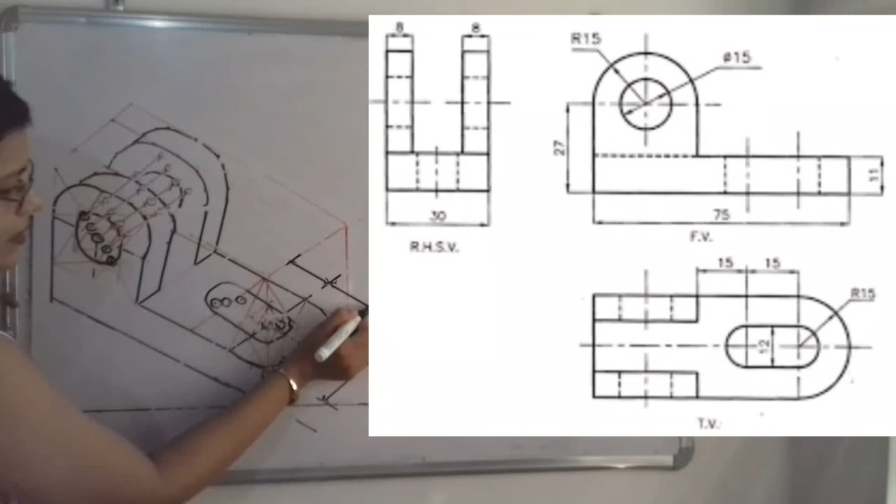So here this is the width. So along the width we have to take the line parallel to it. And now for this width line we will complete this. And now what is the width? That is 30 millimeter. Now we will plot here the distance in between centers. So along this direction only we have to mark here the lines. And now for this length line, what is the distance in between the centers for that semicircle? It is 15 millimeter. So we have to show this.

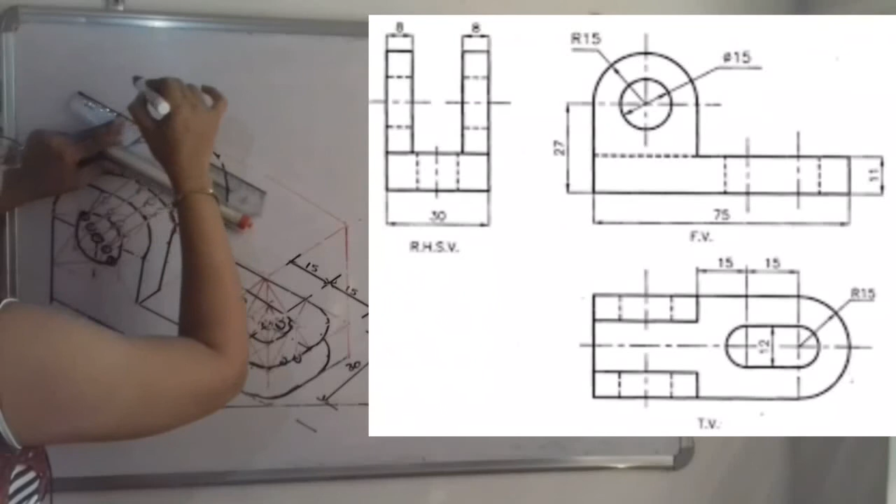Now in the same way we have to show the distance in between this. So along the width line here the distance we have to show. So how to show? It is along the width line, but it is along the length. So we have to take the lines parallel to the length. And now we will select here the line parallel to width, and we will take here. So what is the distance? It is 8 millimeter. So in this way this dimension is shown. So we have to show the same dimension along the height.

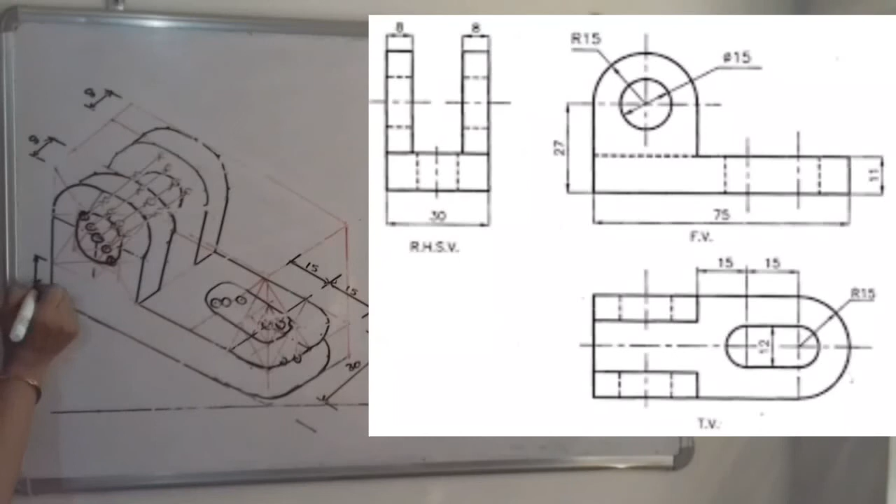So here we have to select that. Now height has the vertical line. So we have to draw the vertical line, and the height is 11 millimeter for this base structure. So in this way these dimensions are getting completed, and this is the isometric view for the given orthographic projection.